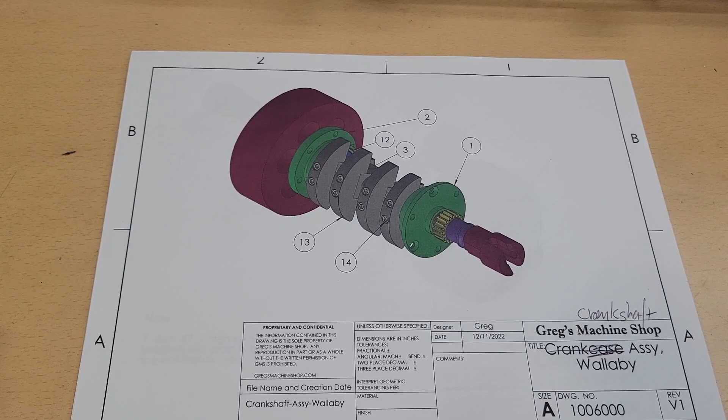So the next assembly we've got is the crankshaft assembly. This is drawing 1006000 - a better picture here, exploded view. Here's our parts list on page 4. We're going to start with the flywheel and this little magnet here.

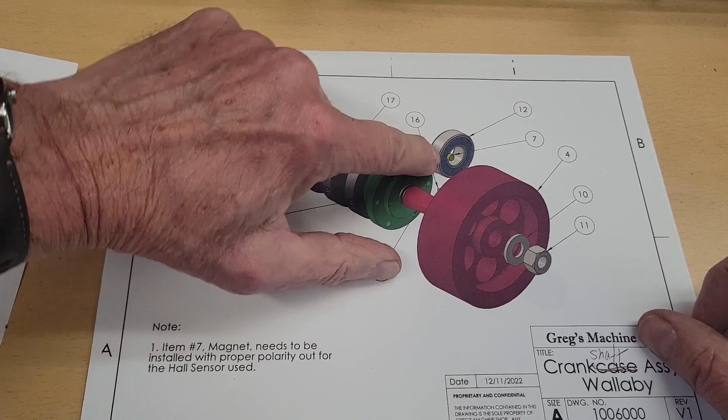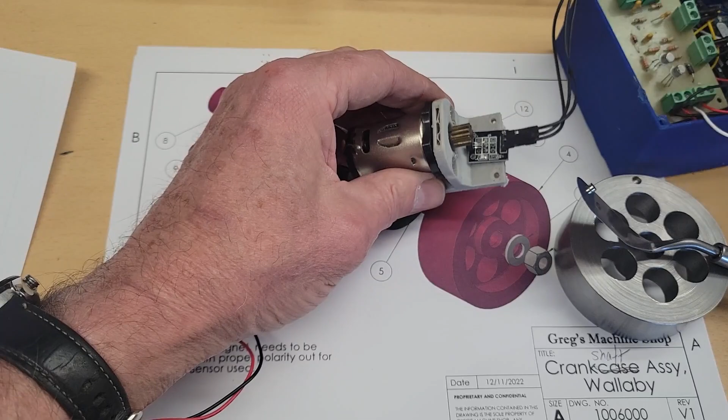This is what triggers our ignition system. We've got a magnet here, 4mm by 1.5mm. We need to figure out which is the North Pole and which is the South Pole. I do that using a Hall sensor that I have here, and if I pass it over one direction, you can see it triggers even pretty far away.

If I flip this magnet over and present the North Pole, which in this case I do not have Sharpie on, over the top of the Hall sensor, it does not trigger the sensor. But if I present the black side, which is the South Pole I believe, it does trigger the Hall sensor. So I'm going to mount the black side facing out on the flywheel here.

This will be when this is straight up, top dead center. My Loctite - I'll use this instead of super glue. There we go.

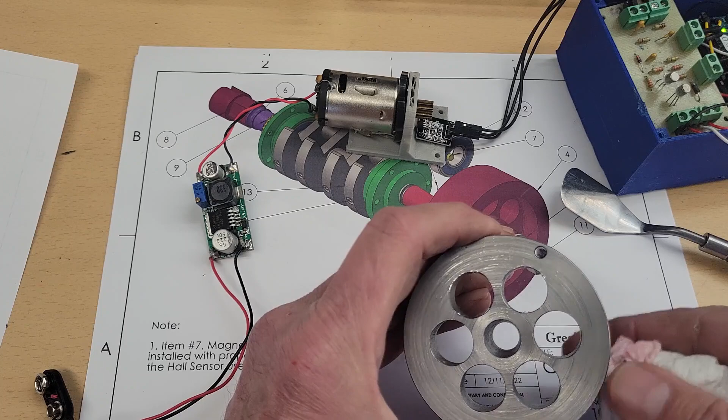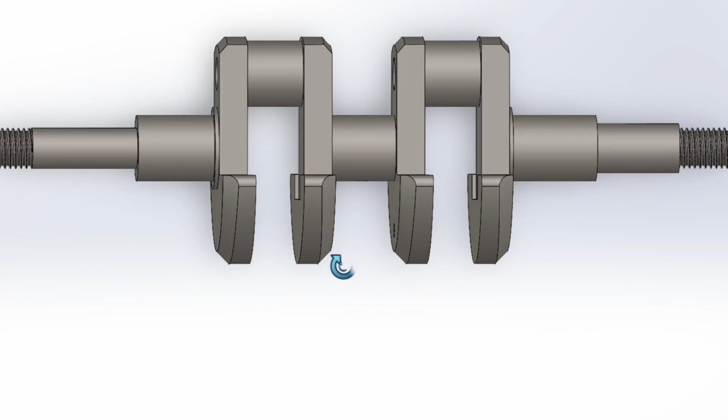I use the blue thread locker Loctite on the 4-40 screws that secure the counterweights to the crankshaft. I want to pause here and make a quick note that I think is really important: before we Loctite our counterweights into place, we need to make sure they're oriented correctly.

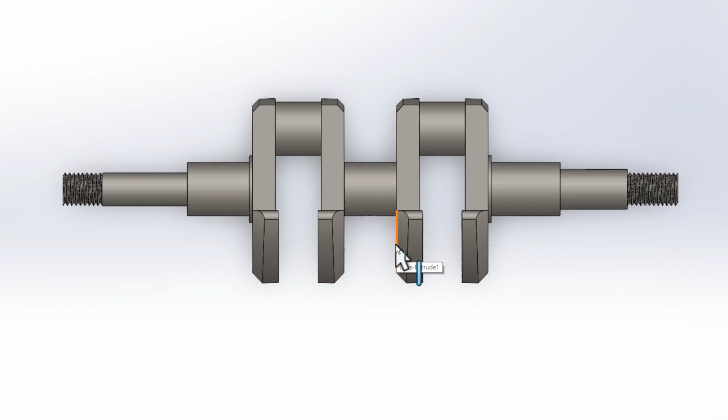The counterweights are wider than the crank webs, and they are biased inwards towards the con rods. So please note that the outside of the crank webs here are flush with the outside of the counterweights, but there's a smaller gap between each counterweight where the con rod connects to the crank pins. Hope that makes sense, because this is really important - you don't want to Loctite the counterweights in place incorrectly.

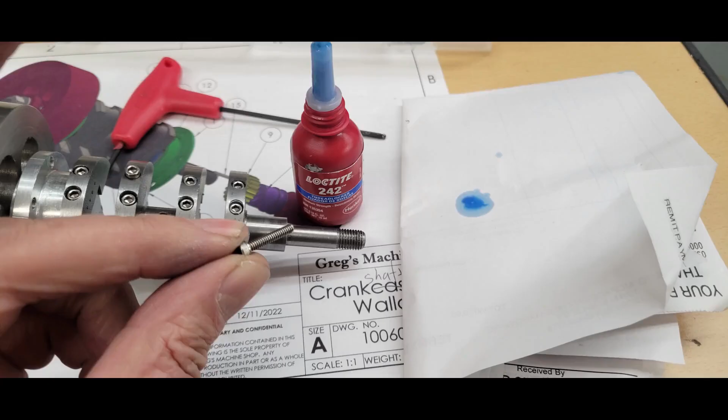Next, we've got our crankshaft. We've already mounted the counterweights and Loctited these in.

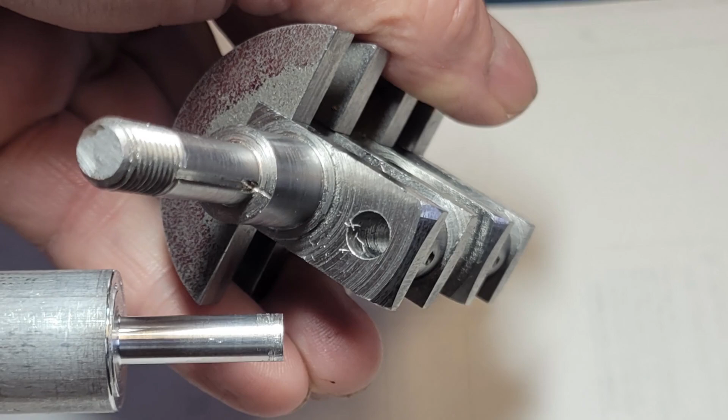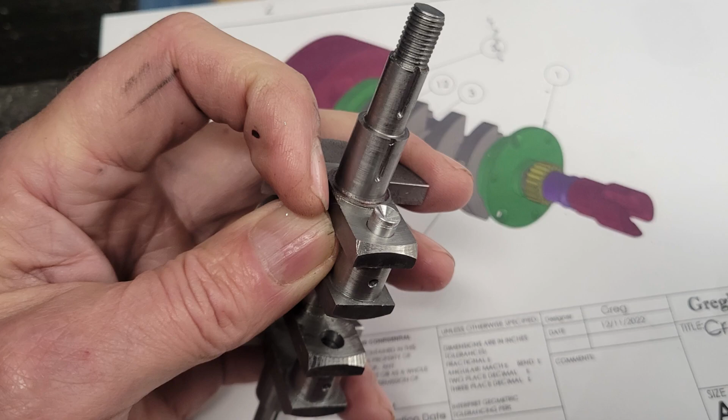We drilled 1/4-inch lightening holes through the crank pins. This space needs to be sealed on both ends at the crank web because the internal cavity is part of our oil gallery that delivers oil from the crankshaft middle main bearing to the crank pins, lubricating the connecting rod big end. I turned some simple aluminum plugs on the lathe, 1/4 inch in diameter and 3/16 inch long, and Loctited them into place. Then finished them flush with the crank webs.

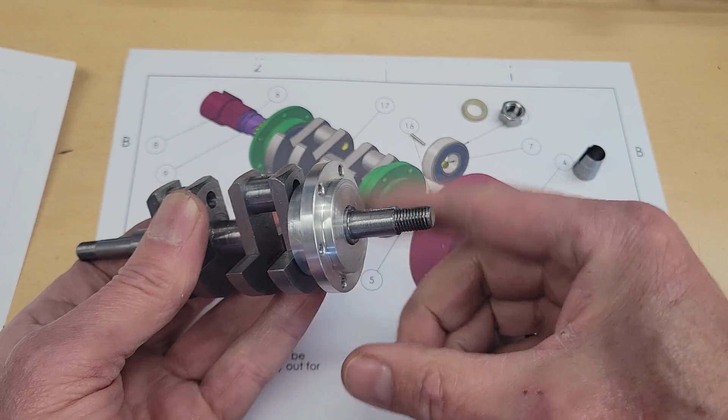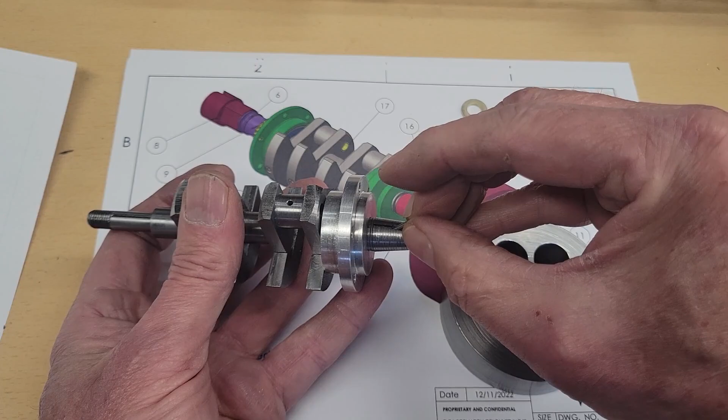The flywheel goes on this end here. Put our main bearing on first. And then put our split collar on. Line up the slot in the split collar with the keyway in the crankshaft. Install our key, which in our case is just a 1/16 inch dowel pin, and then slip on our flywheel.

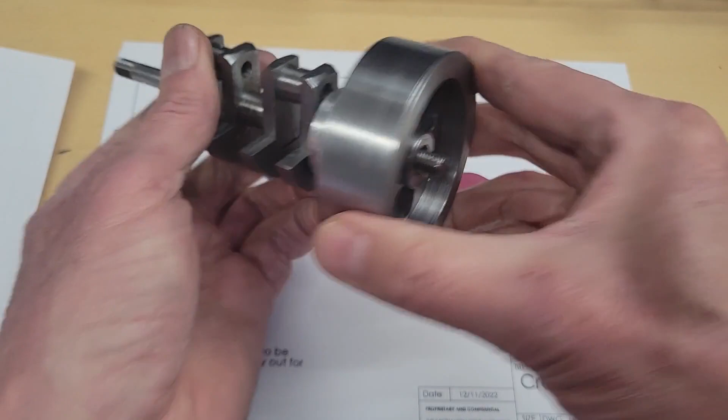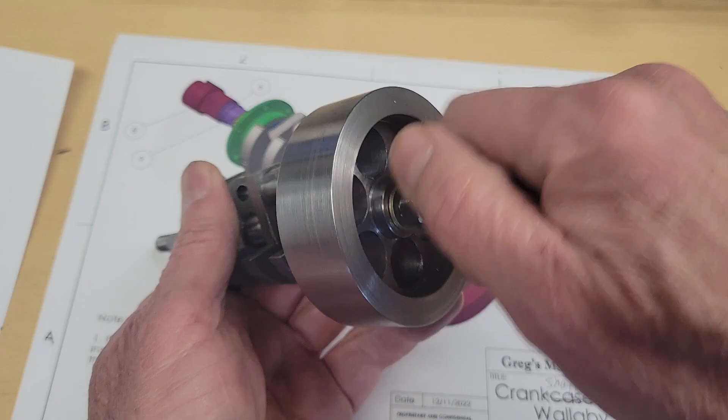The keyway in the flywheel will also line up with our dowel pin and ensure that the electronic ignition triggering magnet embedded in the flywheel is lined up at top dead center. Install our washer and our retaining nut, and then tighten it down.

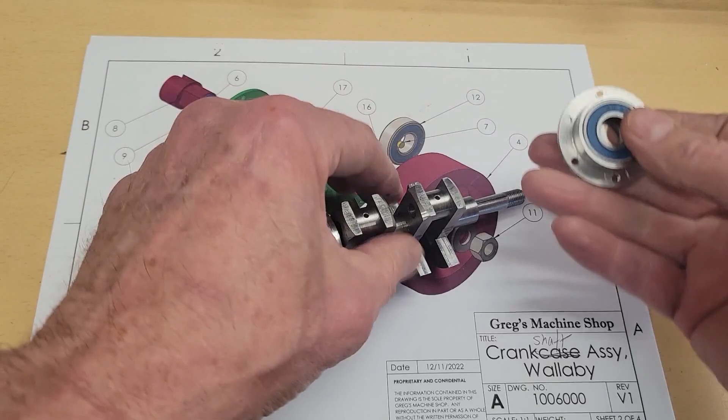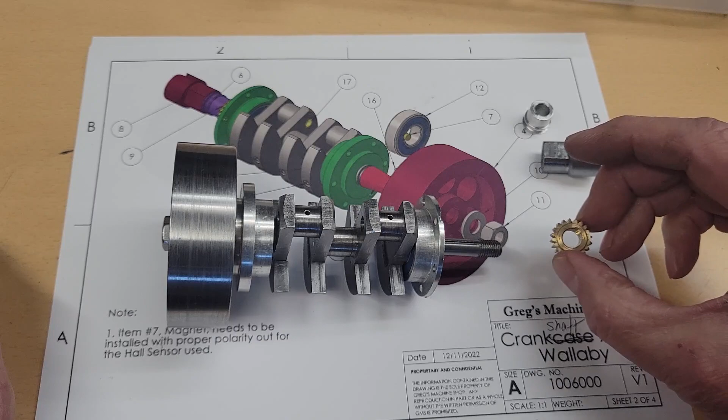Next we have our front end main bearing. This is a test gear that I made. We're going to be making all of the gears in another installment. The drive pinion, this one here, will end up being steel, and all the other gears will be brass. I've made a set of test gears - this one out of brass and the rest out of aluminum, but they're just temporary.

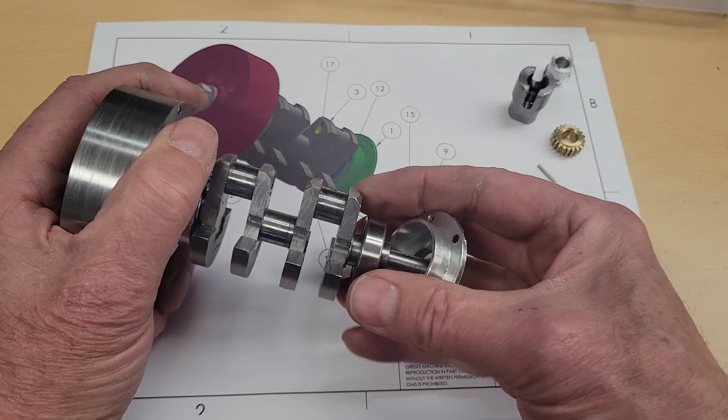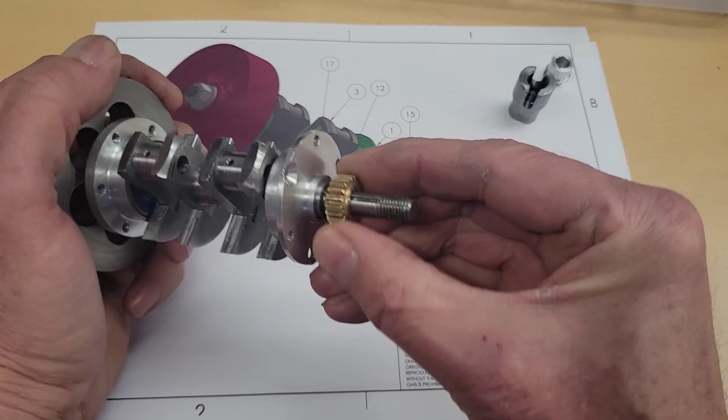Page 3 shows the exploded view of the front end. We've got our bearing and our bearing holder. We've got our drive pinion. We got our dowel. Goes on like yay. Our water pump pulley. And finally, our starter dog.

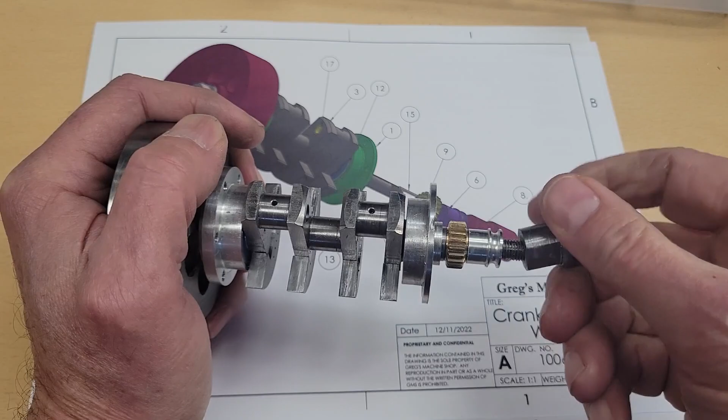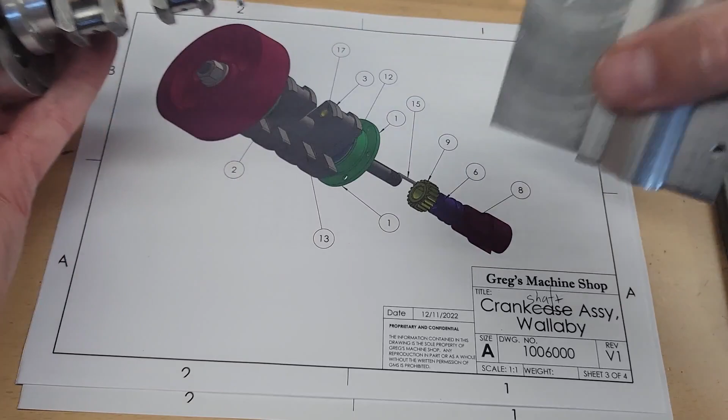And that will complete the crankshaft assembly. It'll drop in there like yay.

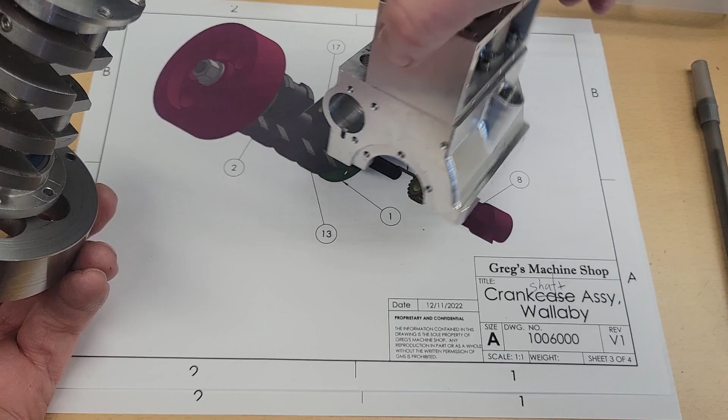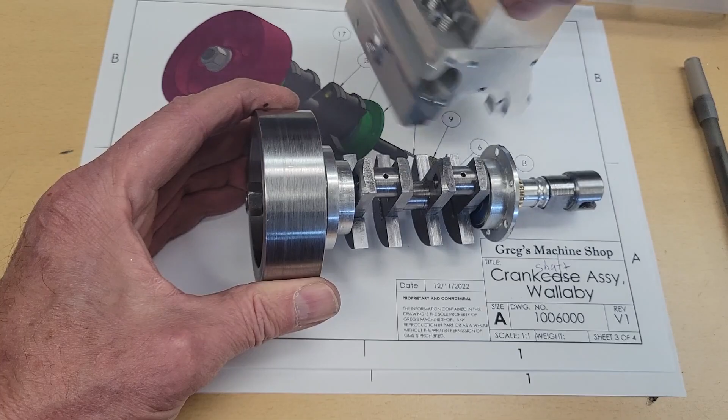All right, well, that completes the crankshaft assembly. Next up, we'll complete the full short block. And after that, we'll complete the head assembly. All right, making good progress, as we said earlier.